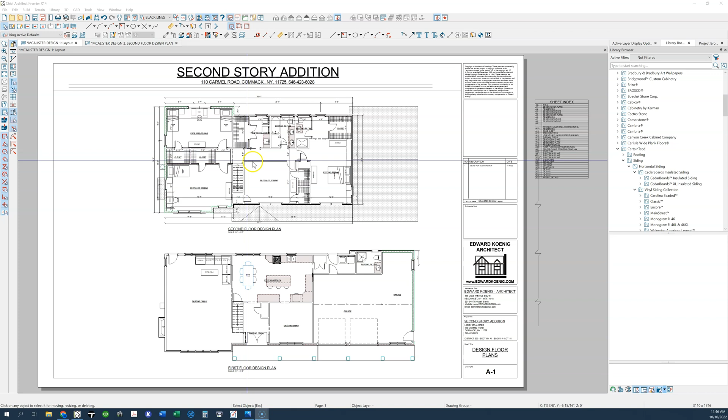Okay, I have your first draft ready for you to review. I'll show you the floor plans first.

I took out the step and the railing between the two rooms and leveled the floor, raising these windows and putting a new glass French door into the back of the house.

This is the addition on the side of the house, going out 9 feet: one window in the back just to give some light, a side entry door, and then 2 windows on the front.

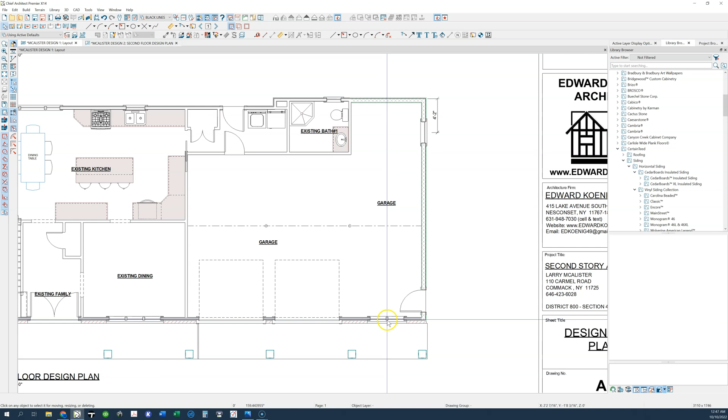I didn't think you wanted another garage door. You don't really have the space for it, it'd be kind of tight. Let me see, maybe we can do that.

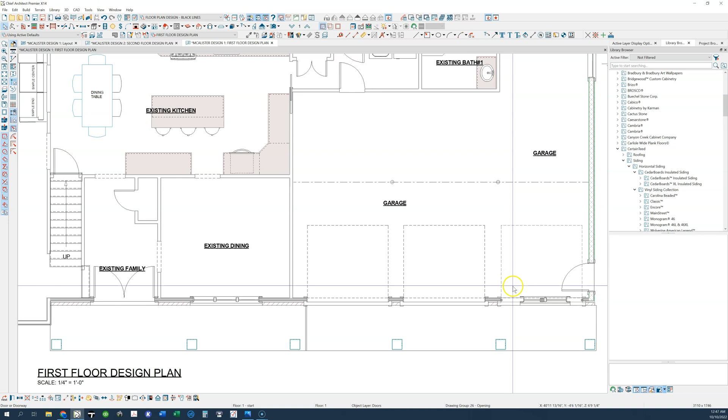Yeah, I guess we could do another garage door. I don't think it's really necessary, especially if you really want this area for storage on a slab. So I'm figuring on leaving the 2 windows in the front.

Going upstairs, the only change I made from the previous design was I added 2 steps going up, because I believe that's how many steps you're going to need to go up to the elevated floor below. You can kind of see this. Let me see if I can make it happen.

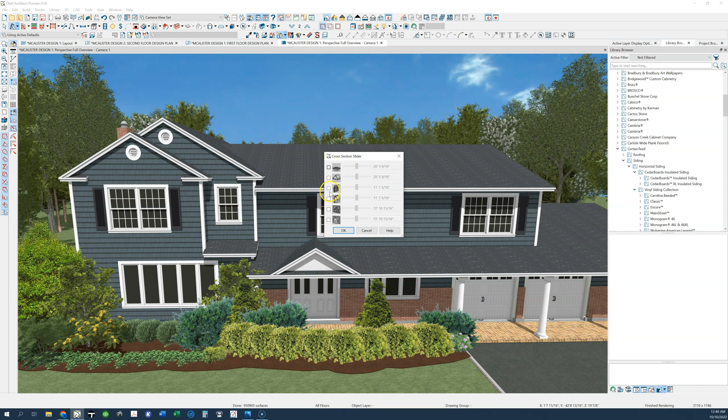Section. Nope, wrong one. Right one. You get to see all the fun tools I get to play with all day.

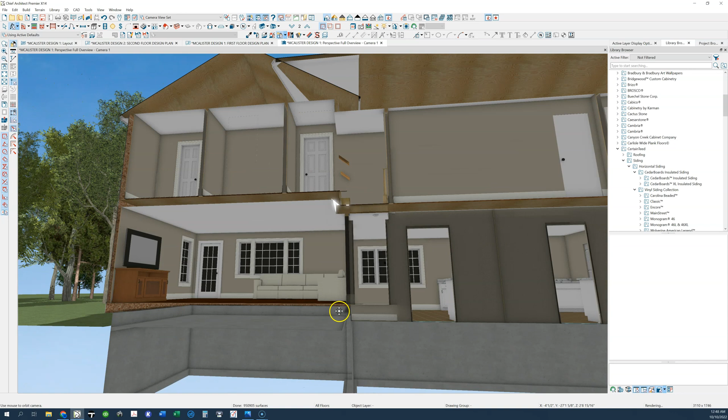Okay, so this is a section through the house. Since this floor here is elevated, you can see it's elevated from the main floor of your house, up 2 steps. This is the main level above, and on the second floor, if this is elevated, this has got to be elevated too. So we're talking going 2 steps up to the addition above the elevated room downstairs.

That might be 3 steps. I've got to figure out, once I do the structure in the floor, if I'm going to be using 2x8s, 2x10s, or 12-inch TJIs. So this may possibly change.

I also changed the closet door configuration over here, because instead of having 2 double doors or sliders, a single walk-in door gives you a little bit more wall space to fit an additional piece of furniture in between the 2 doors. I also changed the laundry room a little bit.

I like having a wash sink in the laundry room, kind of like a slop sink. Sometimes if I don't have this much space, I wouldn't do a dedicated closet — I'd push this wall back and have a full-length wall of base cabinets, so you can use them as like a folding counter.

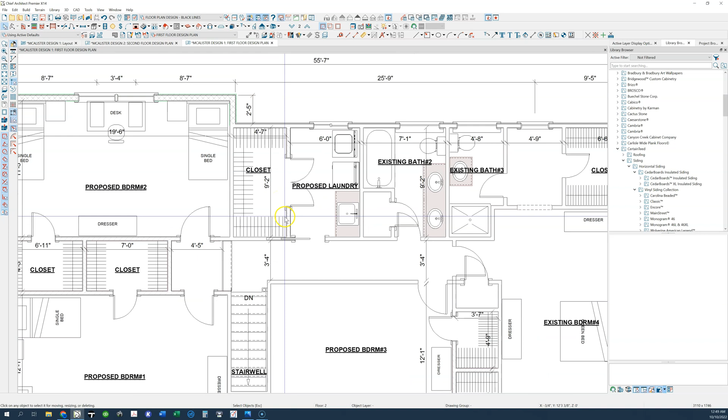But you have a lot of space up here, and I know storage space is very precious for you guys, so I figured I would make this additional closet space. You can fill it with whatever you need to — I know not having a basement is really hurting you guys.

This configuration here, I've got the single beds in here for now, showing the doors. The tough part is I can only figure on really having 1 desk, unless you did bunk beds, and then you'd have a desk and another desk. But this is the configuration I'm figuring with 2 dedicated beds.

I've got to get the windows in somehow. I try not to put them in the corners because structurally it doesn't really work with today's building code anymore — putting windows in the corners, because the building racks in high winds. So you generally have to try and keep the windows at least 2 foot 4 inches away from the corner of the wall to the edge of the window.

I don't like putting windows in the center of a wall either because it ruins how you furnish a room. I could put a window here, 2 foot 4 from the corner, and a window here, 2 foot 4 from the corner, but then it ruins the way you furnish the room because the headboards are there. It really is a matter of how you furnish the room, and that's why I like to show furniture.

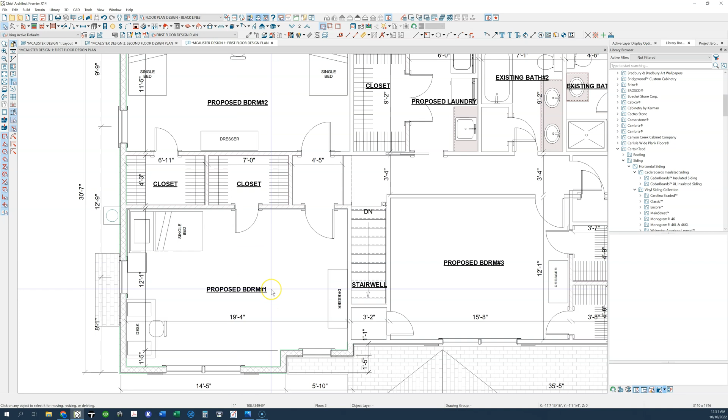You did tell me that you're thinking of having 2 beds in this bedroom and using this as a 2nd-story family room, with the possibility of converting to a bedroom later on. So that's kind of the scenario I went with for the time being.

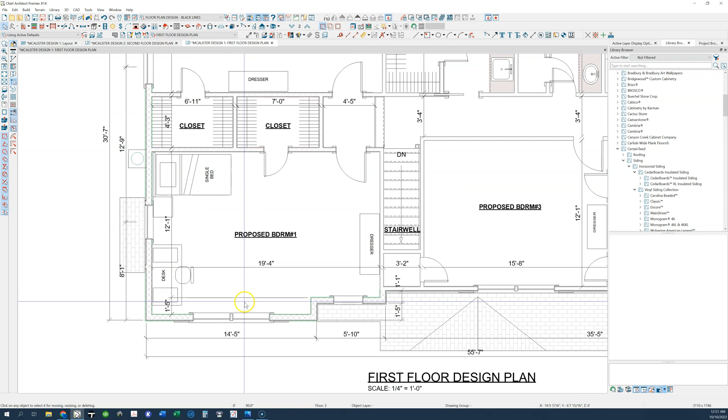Future-wise, I'm figuring bed in the corner, window on the side, desk, and then this kind of dictates the front elevation of how it's going to look on the house. Two windows, a jog in the front elevation for a little bit of depth perception, which then leads us to how the front of the house is going to look. This is pretty basic.

I don't like to add a lot of extra design work to the existing part of the house. We're already changing a lot of windows on the front of the house to get away from that very contemporary casement look you have on the first floor. That's why I did ask you if you liked the more modern design with the whiteboard and batten, because a lot of those designs use casement windows. So if you already have the casements, we could have just continued those upstairs in the addition and kept your existing casements, maybe just moved them around a little bit.

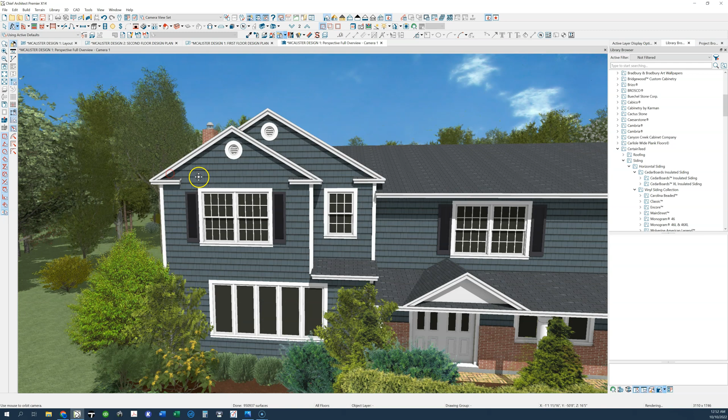I continued the roof line and the gutter straight across. They call this a Greek return or a full return, where this goes all the way across. That way, instead of it breaking like it does here, when the water drains off the roof, instead of having to put a gutter and a downspout right here, the gutter can continue straight across, and then you can put a downspout down over here. So in this case, you'd have a downspout here and a downspout over here.

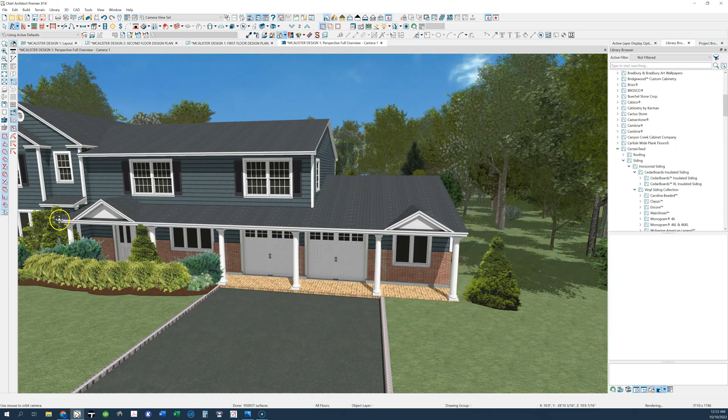And then the back of the house is pretty standard. I did carry the gable front to back across the entire back of the house, especially because this structure is elevated above this structure, and you have a full foundation wall down here.

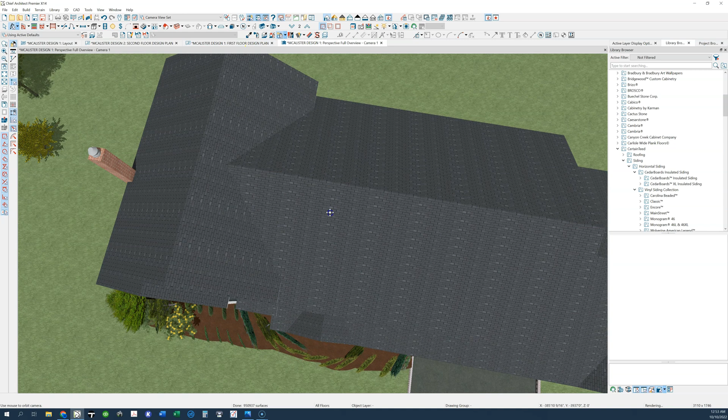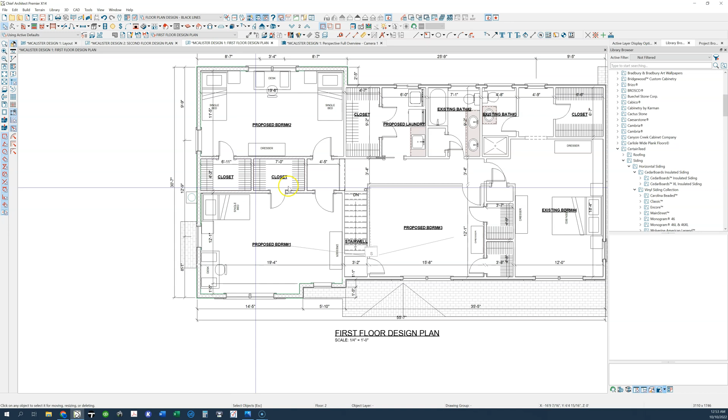Inside the house, the foundation wall is the exterior foundation wall on the left, interior bearing wall here, interior bearing wall here, transferring all the weight from the structure down into this foundation wall here. And we'll work on posting a beam from here to here to support the structure of this, going left to right.

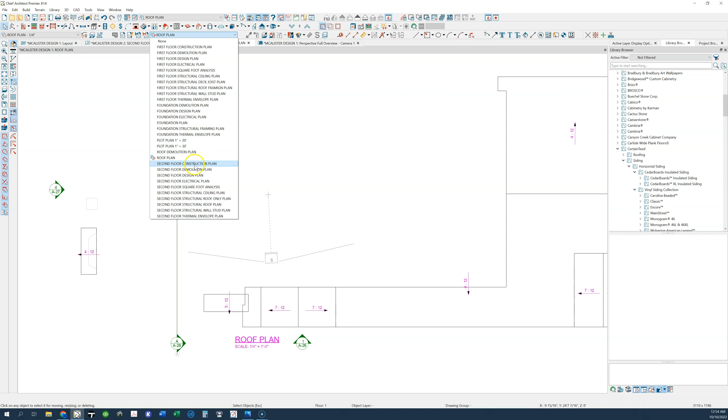And this roof plan with these roof rafters going left to right. In this floor plan on the main part of the house, on the existing structure, your roof structure goes front to back. So all of your weight goes to this rear wall. This is your center bearing wall, and then it also goes to your front wall, because all your framing goes front to back. I'm not sure if this has been framed out yet.

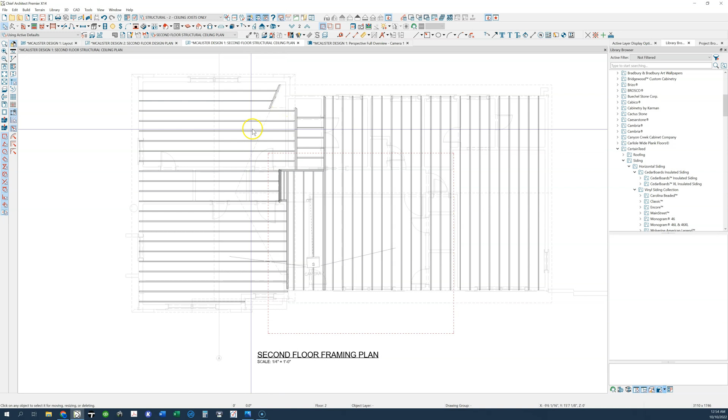Structural ceiling plan, so this is correct. You see all your ceiling joists go front to back. That's your bearing wall. In our proposed design for the addition, the structure goes left to right. So the left side of the house is going to become a structural wall, and the wall between the kitchen and the living room and the stairwell wall is going to become structural. But you don't need to worry about that right now.

That's my problem. All right, so this is where I've got the design right now. Let me know also if this blue, I think it's Pacific Blue, Cedar Impressions, is too dark.

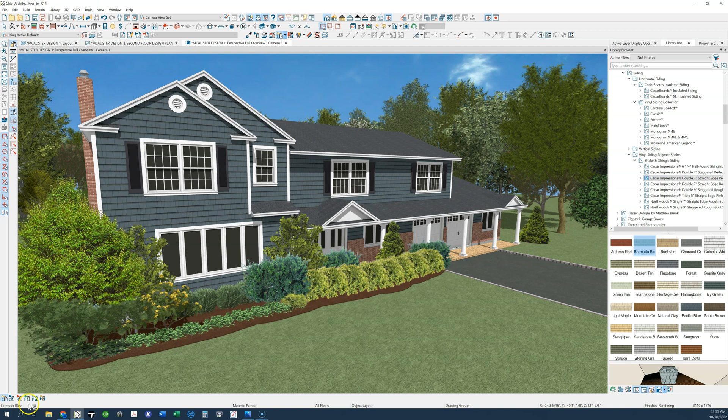I can literally do, let me see, where is this? Vinyl, polymer, straight edge. Okay, I mean, I could also go with this. Yikes, that's a Bermuda blue. I don't think that's what you were intending. I can go charcoal gray.

I could go autumn red. I can go, I'm a sucker for gray. I like how gray pops with the white trim and the shutters. That's a little too light gray. I like granite gray.

So I can change any color you want. You let me know what you like, what you don't like. I can also change the brick veneer to be some kind of cultured stone overlay. But this is where we stand right now, so just give me some feedback. Let me know what you do like, what you don't like, and we'll make the changes from there. All right, I'll talk to you soon.